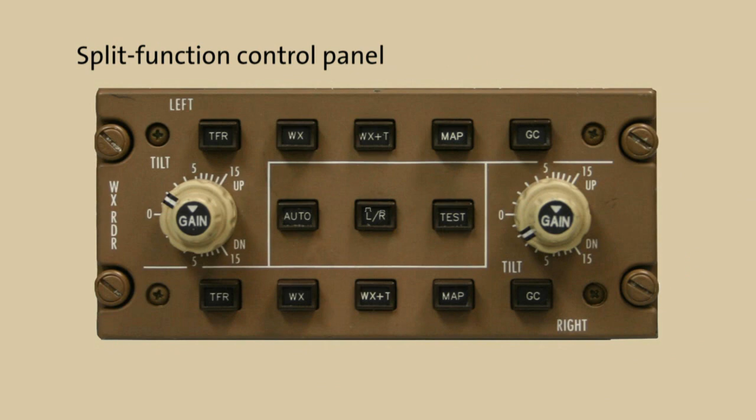Boeing aircraft are equipped with a split-function control panel, giving the captain and first officer independent control of the radar. The captain's controls are at the top and left, and the first officer's controls are at the bottom and right. Controls that are common to both crew members are in the center of the panel.

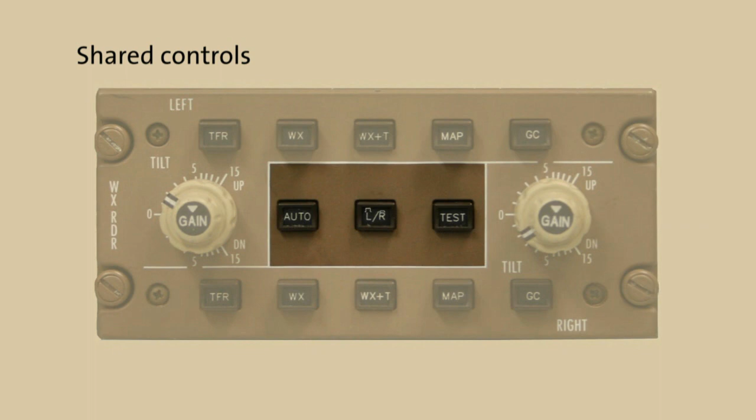Auto toggles between the radar's auto and manual modes. When toggled to manual, the letter M is displayed. In manual, the radar works exactly like traditional manual radars. Tilt and gain must be manually controlled by the pilot. Further, with the exception of wind shear, automatic features are disabled.

The letter A is displayed next to the tilt code on the ND when in auto. When the radar is in auto and the weather mode is selected, MultiScan's essential automatic weather detection features are activated. When auto and the WX+T mode are selected, essential automatic features and turbulence are displayed.

On aircraft equipped with dual systems, when the center button is in the out position, the left RT is active. As indicated by the hat symbol on the button, the right RT is active when the button is in.

The test button initiates the radar's test function. When test is selected, the radar performs a self-test. Detailed test procedures can be found in the MultiScan Pilot's Guide.

Transfer allows either pilot to select the other crew member's display settings. For instance, should the captain push his transfer button, the settings selected by the first officer would be displayed on his ND. Weather radar is, of course, all about showing weather.

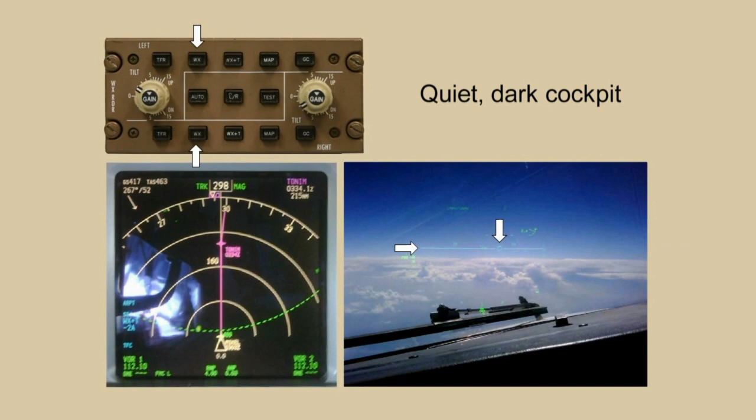MultiScan uses the quiet, dark cockpit philosophy. In other words, if the weather is not a threat because it is below the aircraft altitude, it is not displayed. Note the flight path vector on the HUD display, and also note that it is intersecting the 0-degree pitch line, indicating that the aircraft flight path is above these cells. Also note that the display shows a clean screen since the weather is below the aircraft flight altitude.

Weather that is below the aircraft altitude is often visible from the cockpit, and there are occasions where it may appear that cells should be displayed, but are not. For instance, this cell is not displayed, but is it at the aircraft altitude? How about now? The fact is that this is a post-convective cell.

On close approach, it can be seen that there is no substance to the cell. In fact, you can see right through it. In addition, the cell is 1 to 2,000 feet below the aircraft and thus not a threat. Again, applying the quiet, dark cockpit philosophy, this non-threat cell is not displayed.

A quick note on radar beam width. Although a 3-degree radar beam is pretty narrow, the fact is that at 80 nautical miles, it is already 25,000 feet in diameter. What this means is that even when the radar uses multiple scans, the height estimation of the cell becomes more and more coarse the further the cell is from the aircraft.

So on occasion, weather that is initially visible at longer ranges may fall off the display as it approaches the aircraft, and the radar can better determine the cell heights.

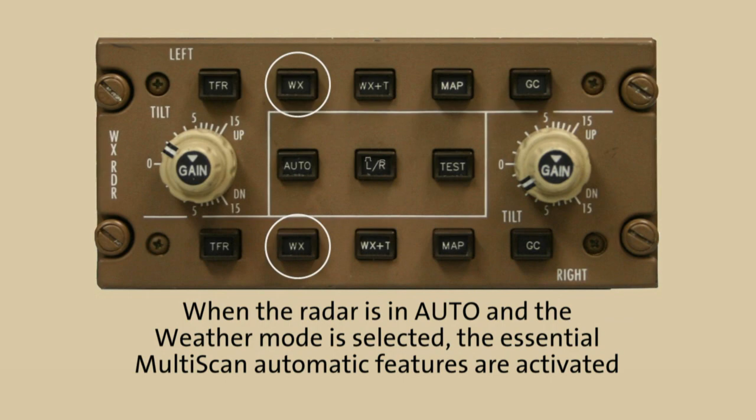Remember that when the radar is in auto and weather mode is selected, the essential MultiScan automatic features are activated. In weather mode, the radar paints the standard red, yellow, green, and black radar colors. Remember that black is a radar color. Black does not mean that weather is not present, but only that the weather is not reflective enough to meet the green threshold display criteria.

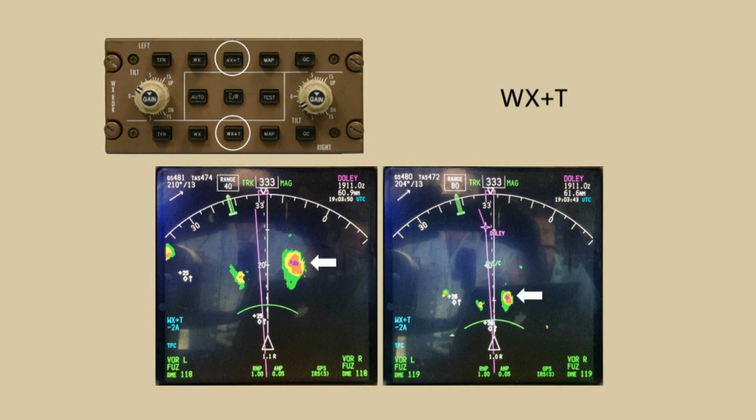WX+T enables the essential MultiScan automatic features and Doppler turbulence detection out to 40 nautical miles on all range scales. Map mode displays all the information that the radar sees, both ground and weather returns. The ground clutter button is similar to map mode, except it is a spring-loaded momentary function.

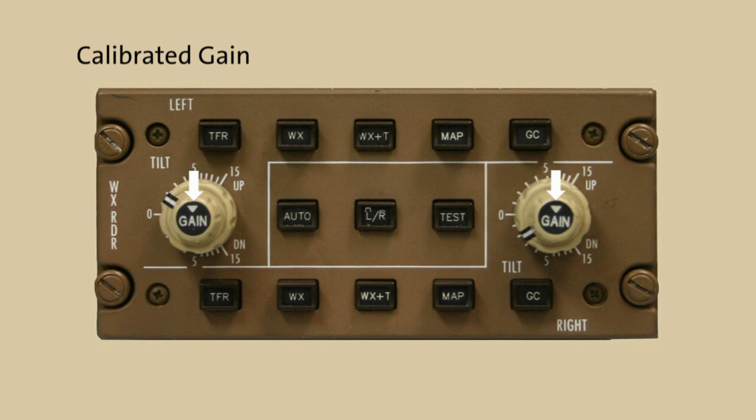The tilt control is inactive during auto operation. Full above and below the calibrated gain position is available during both manual and auto operation. Calibrated gain is selected when the triangle is at the 12 o'clock position. When the radar is operated in manual and calibrated gain is selected, standard radar reflectivity rain rates are displayed.

An increase or decrease of 10 dB of sensitivity represents a change of one color level. Increasing the gain to max increases the sensitivity by 16 dB, or an increase of 1.5 color levels. Yellow will display as red and green will display as yellow or red. In addition, areas of black may display as green or yellow.

Conversely, selecting minimum gain decreases the sensitivity by 14 dB and reduces the color levels approximately 1.5 times. Thus, green returns and a significant portion of the yellow returns will disappear, and red will turn to yellow or green. Essentially, in min gain, only thunderstorm cores are displayed, and they will be represented as green or yellow. Min gain should be used for momentary weather evaluation only, and then the gain should be returned to the cal gain position in order to avoid underrepresenting the thunderstorm threat.

VAR will be displayed on the ND below the tilt code when the gain is in any position other than cal. Now let's explore gain in auto mode.

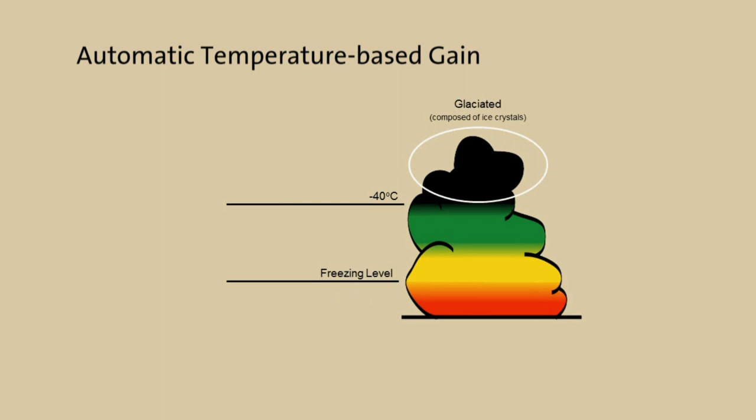A typical thunderstorm is very reflective below the freezing level. However, the top third of the storm tends to be glaciated and non-reflective. As an aircraft climbs, the radar beam moves higher in the cell, and at cruise altitudes can overscan the reflective portion of the cell, resulting in inadvertent thunderstorm top penetration.

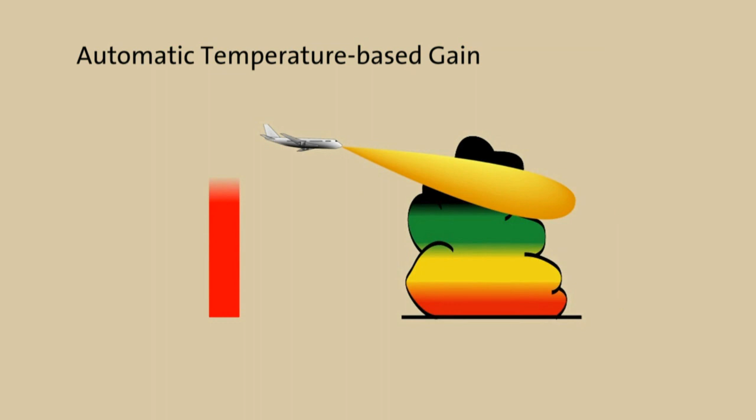In auto mode, MultiScan uses an automatic temperature-based gain to reduce this threat. As the aircraft climbs and the outside air temperature decreases, the radar automatically increases gain to compensate for the lower reflectivity of upper-level thunderstorms. So let's see how this works in actual operating conditions.

Note that at cruise altitudes, manual max gain and auto cal gain are essentially equivalent. In auto, further increasing the gain above the cal position may result in overwarning and unnecessary deviations. Rockwell Collins recommends that the radar be operated in auto, cal gain, and WX+T in all phases of flight. The one exception is that at top of descent, it is recommended that manual momentarily be selected to examine weather along the descent flight path.

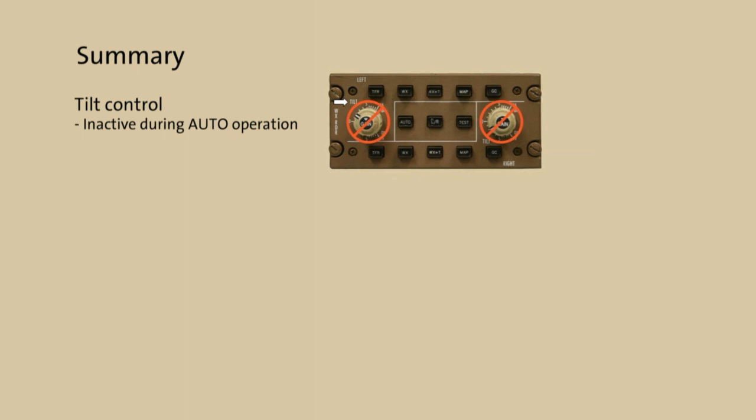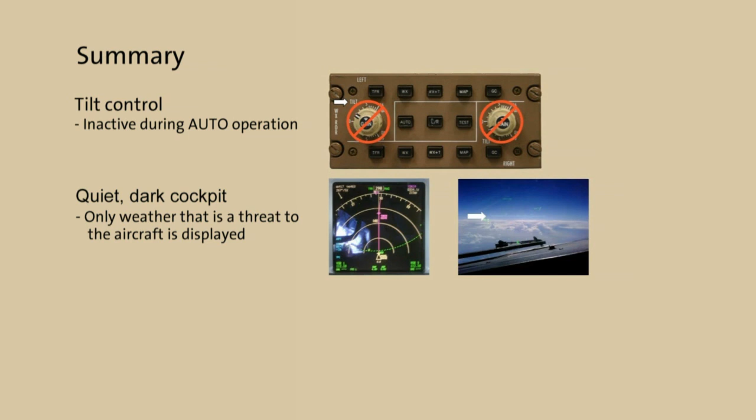In summary, remember that full above and below gain is available during both manual and auto operation. Major differences between operating the radar in manual mode and in auto mode include the following. First, when operating in auto mode, the tilt control is inactive. Second, in auto mode, MultiScan utilizes the quiet, dark cockpit philosophy, and weather that is below the aircraft altitude is not displayed. Third, automatic temperature-based gain increases the gain as the aircraft climbs into colder regions, resulting in a picture that is very similar to manual max gain at cruise altitude.

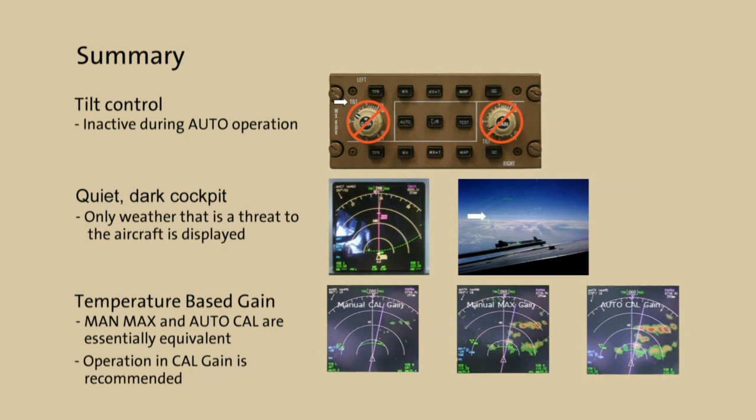Operation in cal gain while in auto is recommended. Finally, the recommended operating mode is auto, cal gain, and WX plus T during all phases of flight.